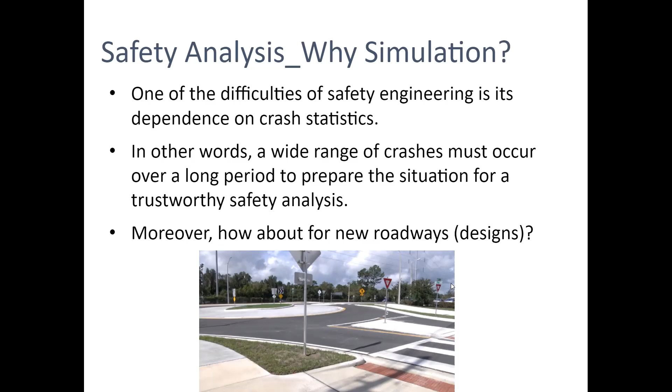SSAM provides a great opportunity to get the safety of roadways, of traffic facilities, without waiting a long period to observe the crashes and injuries after the construction of any facilities, roads, roundabouts, intersections, whatever.

Okay. So what we are going to do is, instead of analyzing, because obviously in a simulation setting we are not going to observe the crashes, we'll observe how close these two vehicles got to each other. And if that distribution of the time and space distance between those two agents shows they get very, very close, then you can expect that more collisions would also happen on that road, because the design is such that drivers or other road users are having to make those types of maneuvers.

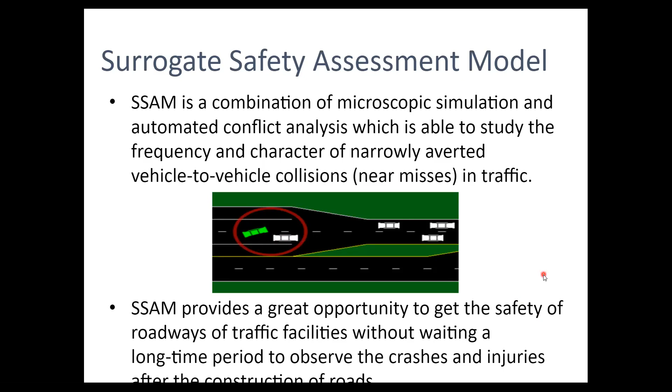Okay. So SSAM analyzes the frequency and character of vehicle-to-vehicle conflicts. SSAM is the Surrogate Safety Assessment Model. It's a computer program that you can download on your computer. It's free. And for this purpose, SSAM uses the trajectory files of traffic simulation packages to recognize the type and number of near misses. Now, this is where your simulation is so useful.

You have what we call .trj files. From your VISSIM models, you can always export what we call .trj files. These TRJ files are trajectory files, and they document every tenth of a second, or whatever resolution you have specified, where each individual vehicle was.

Okay. And then what the surrogate safety assessment model does is it takes that trajectory file, and then it tells you how many times vehicles got closer than a particular threshold. And there are measures that we're going to talk about right there at the bottom of this. For this purpose, SSAM uses trajectory files to recognize the type and number.

And then here's the key measure of effectiveness or measure of performance, which is time to collision, TTC. Okay. So you specify the TTC threshold to be 1.5 seconds, and SSAM will tell you how many of the vehicles in your overall model got closer than that 1.5 seconds. And you can change that threshold also in SSAM.

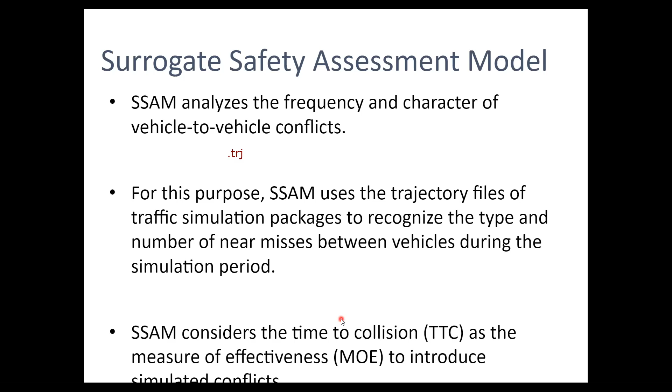So here is the key thing though: this is not just applicable to simulation anymore. Nowadays, there are programs that can do that type of analysis for you even in the real world. And how do they do it? We video record a certain location on the roadway, and then we apply video analytics to that.

And that's what our guest speaker is going to talk about next week: how can you take the video analytics from a real-world situation, convert that into trajectories of vehicles, and then apply the same types of thresholds. How many vehicles got closer than 1.5 seconds? Okay, or 1 second, or whatever your threshold is. How many near misses actually happen? So you can estimate that.

So what we call that technique is the traffic conflict technique. Okay, traffic conflicts are a technique to assess the safety of a location with the understanding that conflict frequency is correlated with the risk of actual collisions. So if you have more conflicts happening, more collisions will happen. And this is a very simple idea that you see all the time when you're talking about, let's say, a 4-legged intersection versus a roundabout.

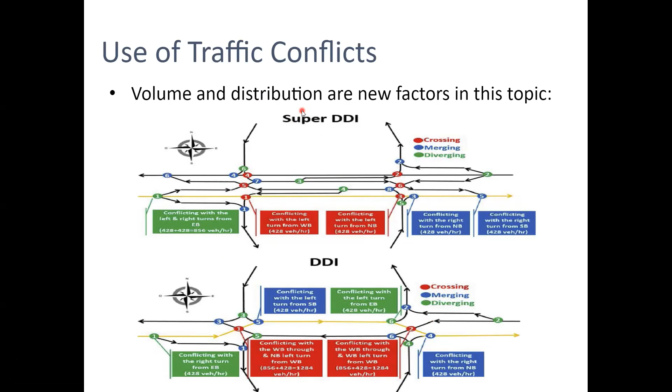So I want to go back to the SSAM. So SSAM was Gettman and Head 2003. It was the first attempt to develop a surrogate safety measure-based approach. And then all of that work resulted in the development of SSAM in 2008. So it's a long time ago now. And I think this is the 3rd version of SSAM now. And then we wanted to see to what extent the analysis that you do in the surrogate safety assessment model translates to the actual safety. So when you talk about validation and calibration in this context, you know what that is?

Validation in that sense is you do the conflict analysis using SSAM, and then you look at historical data from that same location, and see if those things correlate or not. So there are studies that have been done. They simulated 20 different signalized intersections, and then they looked at 3 years worth of collision data for those intersections. And then using the simulated models, they estimated all the conflicts, and analyzed if the conflicts correlated with the actual collisions on those locations.

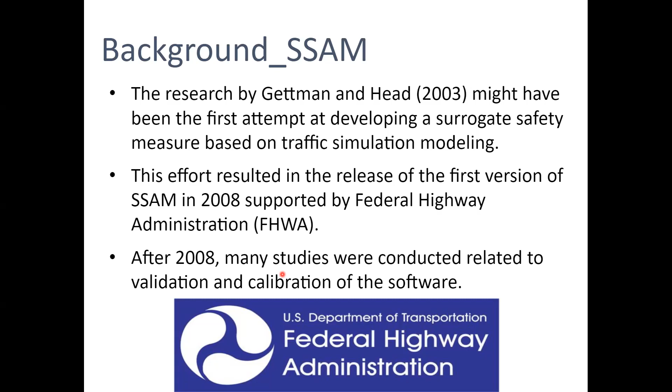And for the most part, they did see that there is a significant correlation between the simulated conflicts and how many crashes you were observing, which is great, right? Because now, if you know that high collision locations are also your high conflict locations when you analyze them with simulation, that means you don't have to wait 3 years to figure out which locations are most dangerous. You can actually build a reliable simulation model, and based on that, do your safety assessment. So that makes simulation a very powerful tool even for safety analysis.

But the calibration of the simulation model is very critical. There have been studies that looked at a well-calibrated model versus one that used all the default parameters. They saw that they could improve the correlation between collisions and the simulation by as much as 50%. So what this study found was that if you do well with your delay model and your travel time model through an intersection, that means you're capturing the stopping, the acceleration after the stopping and all of that correctly. If you're able to capture all of that, then your safety outcomes are also very accurate.

Okay, so this is also good news, right? Because now, if we build a good model that is very well calibrated for travel time and merging and all of that, that means that we are also building a very accurate model for safety, which is great. It's very useful for us to be able to do that, because we are not using 3 years worth of collision data. We're able to do it using a simulation model.

So this tells me that I don't have to do anything super fancy to build a surrogate safety assessment model. If I'm building my simulation model right, where my merging behaviors are accurate, my stoppages are accurate, my car following is accurate, then my travel time and delay would be good too. And then if I use that model for safety assessment, that will work just as well too.

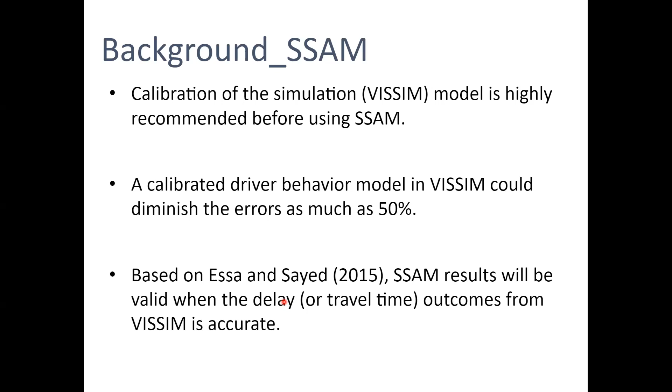So there was one study that found that if you estimate the collision conflicts at an intersection, if you estimate the annual number of conflicts, and you do 0.119 times conflicts raised to the power 1.419, this equation actually works really well, at least for signalized intersections. For signalized intersections, you can estimate the number of crashes one would expect using this little formula.

And again, the specifics of this formula I don't care about, but what is important is that, yes, as the conflicts go up, crashes go up as well, and they go up with some sort of exponent power, and then there is a calibration factor at the beginning, 0.119. There is a paper about that, and I provide a link if you want to look through it. But the key message here is that crashes do indeed increase as the conflicts increase.

So you can make a pretty good safety assessment just by looking at how many conflicts are happening in your simulation model, and use that to say, okay, I can forecast my crashes, or at least get a good sense of them. And especially you can make very good relative assessments. So if you have two different intersections, you can look at the conflicts. Whichever one has more conflicts, you can expect to have more collisions as well.

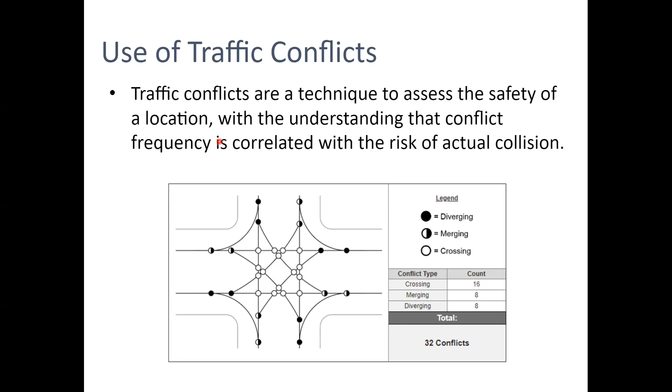Yes? Are these conflicts like the 32 number or no? So these 32 are, I'm calling them conflicts, but if you want to be more accurate about it, I would call them conflict locations. These are points of conflict. What I'm calling conflicts in this equation are a little more interesting than that. It's the actual number of times the vehicles got close to each other. And how do I define close? I define close based on a threshold that I'm going to provide to the model. I'm coming to that right now.

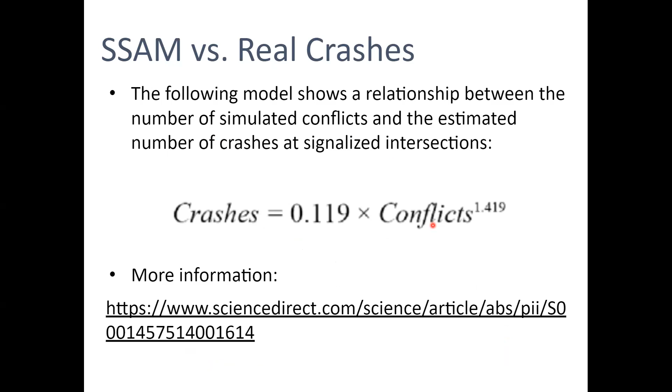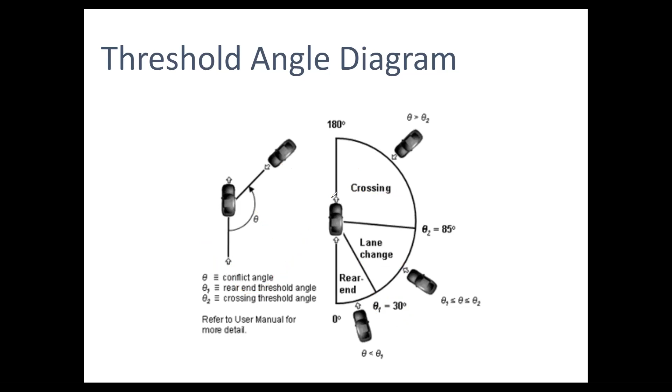So when you analyze any trajectory file with SSAM, it also tells you what type of conflict it was, because it's also looking at where those vehicles were approaching from when they avoided that collision. Building a precise simulation network is one of the most important steps to get useful SSAM results. So what you've been learning should help you build a good safety assessment model as well.

Some conflicts might be observed with TTC being 0. Obviously, TTC 0 means crash, but that could happen if your links and connectors are not well drawn, and if there are overlapped links in the model. So you want to avoid that as much as possible. That's what we've been talking about in the lab as well, right? We don't want to have very significant overlap between two links. You might have some, but you try to minimize that as much as possible so that you don't observe that TTC equal to 0 situation.

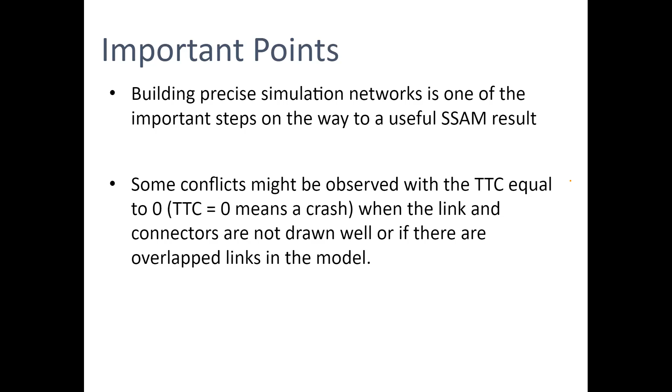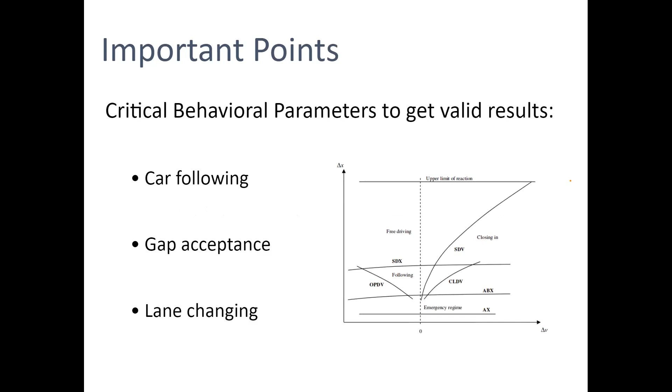Okay, and then critical behavior parameters to get valid results. We've seen this chart before. Adjusting car following, gap acceptance, and lane changing can help you not just with calibrating your simulation model very well, but also doing the right thing from a safety assessment perspective. So surrogate measures that we use: time to collision is the most important one. We use it all the time. And then there are other ones.

Minimum time to collision, minimum post-encroachment time, PET, initial deceleration rate, maximum speed, maximum relative speed difference, and all of those things. And then the location of the event. Not exactly a surrogate measure, but it can tell you which location is more dangerous than others. If you look at the chart that I showed you earlier, you can say that this is a location where vehicles are getting too close to each other, right here.

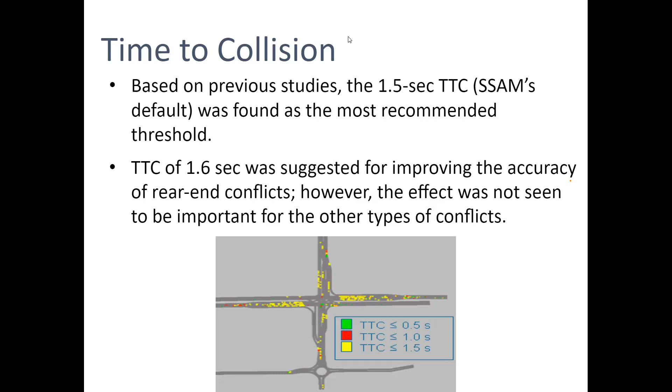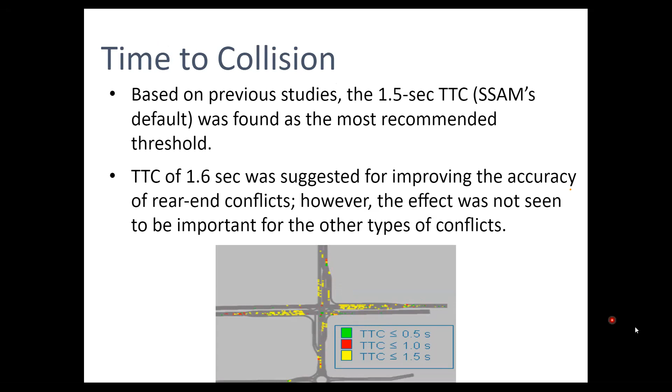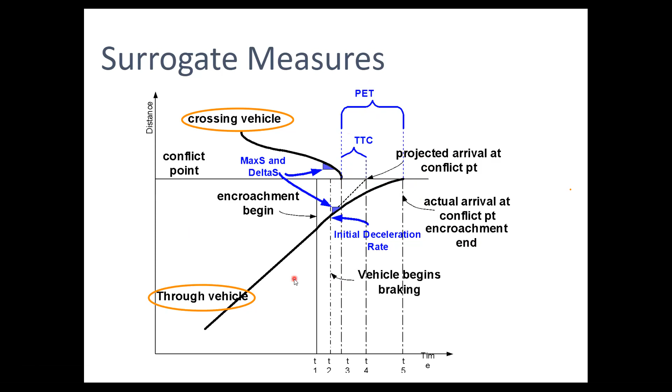And then I want to talk about maximum speed and maximum relative speed difference. Maximum relative speed difference is basically looking at the relative speed difference at which they are approaching that conflict point. And maximum speed is the maximum speed of the crossing vehicle. I'm just figuring out at what point this slope is the maximum. What's the fastest that the crossing vehicle is ever driving?

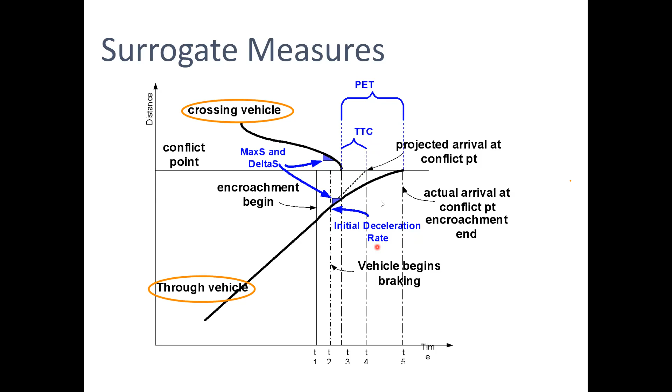So those are a few, but the most widely used conflict measures are PET, TTC, and the initial deceleration rate, because they have been found to be most related with collision experience, with TTC, time to collision, being the most important.

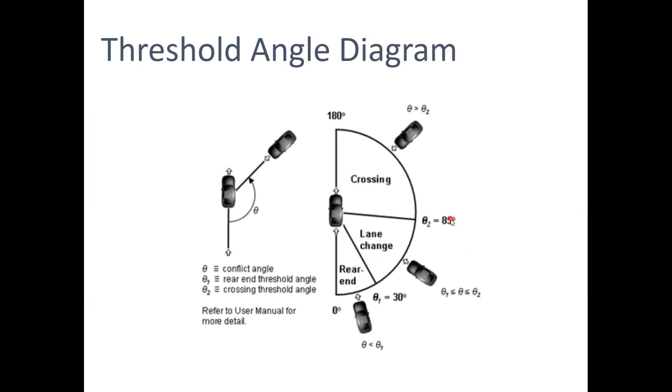And then you analyze the file. And then once you analyze the file, it provides this type of an output to you, okay? It tells you what is the average time to collision, average post-encroachment time, all of that. And then how many of them exceeded 5 seconds or how many of them exceeded 1.5 seconds, and so on and so forth.

So what I'll do is that once you're done with this model that you're building with the roundabout, we'll do a quick lab on actually taking the trajectory files from these roundabouts that you just modeled, and then be able to get the conflict data out from SSAM. Okay, so that'll be one project that we're going to work on, and so we'll go from there.

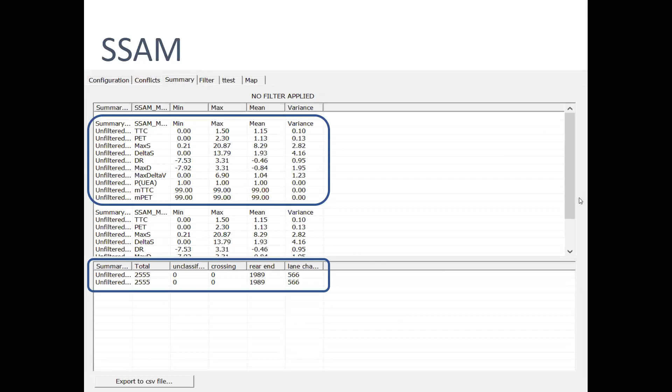And then yeah, so that's basically the idea of SSAM, and then you can export all the results to a CSV file. You can do some post processing, but we'll talk about that in the lab context. So yeah, this is basically what I have here for your surrogate safety based assessment. Are there any questions about this? Any questions?

So I think this is the key thing, right? When you work on the lab, you'll probably come up with some questions. So we'll talk about those in that context. But the idea would be to take the trajectory file from VISSIM and input that into the surrogate safety assessment model.

And then, by the way, what our guest speaker next week is going to talk about is basically doing the same thing, but now with the video analytics data. So try to derive these time to collision, post-encroachment time, all of that, by automatically analyzing the video data. So how close two vehicles got, how many near misses were there, and we know that they correlate with collisions. So that way we can more proactively assess safety.

And we have a research project that we're just going to be starting, where Caltrans is building a turbo roundabout. It's a different type of multi-lane roundabout that tries to limit some of the internal lane changes. And what we're trying to do there, obviously they're just building it right now, so we want to see what happens to the conflicts compared to what's happening right now. So right now it's a four-legged intersection, and we have certain conflicts that we've video recorded.

Now, once the turbo roundabout is built, we're going to video record the new data from the turbo roundabout, and we're going to use the model that is being developed by TrafxSAFE, which is Transoft. The company is called Transoft. Transoft has built a model to do the video analytics for us to be able to do the conflict analysis.

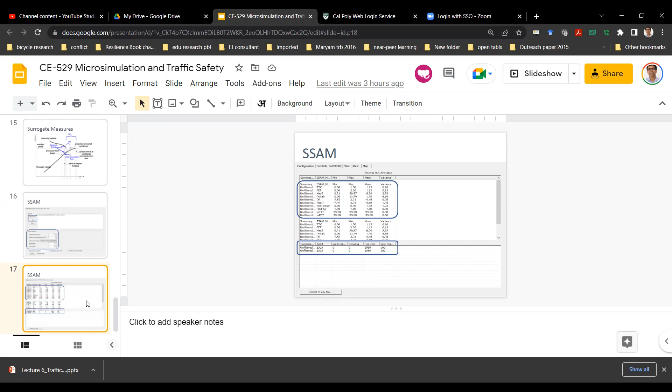Okay, and then one more thing is that this video analytics could be also useful from one more perspective: you can actually take the video analytics of a certain real world location, and then compare the results that you're getting from that video analytics to the results that you're getting from VISSIM. So you can even use that video analytics to validate your VISSIM model even further, at a more granular scale. Rather than just looking at travel times, now you can see, am I getting roughly the same number of conflicts that I'm getting in the video? Or am I able to capture similar numbers in VISSIM?

So there's a lot of applications. Those are just coming online. So I think this proactive assessment is going to catch on. I think collision data is just not, yes, we want to use that gold standard over time, but we cannot solely rely on that for safety assessment. So I think that practice has to change. It is changing. So I think you will probably see that adopted more and more as you all work, if you end up working in that area.